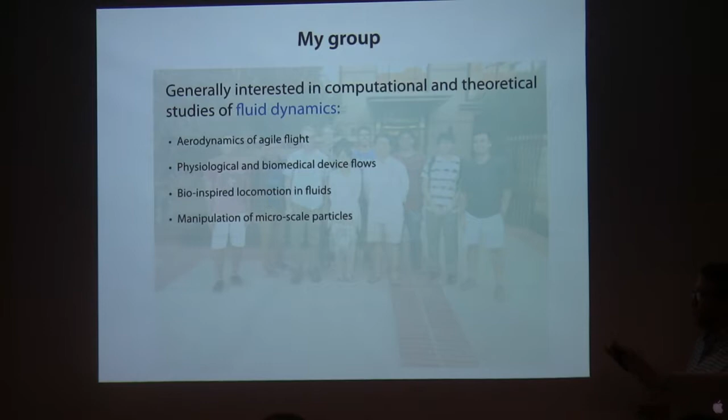So my research group is all over the place in the fluid dynamics world. It may not seem very broad to you, but to a fluid dynamicist, this is quite broad. So we work on problems in aerodynamics of agile flight, and I'll show you an example of that today. Also physiological and biomedical device flows, so we're working with people in the medical school on problems in their purview. My main topic today will be this third one, bio-inspired locomotion, and we work on other things as well. So basically we're just hard to pin down on what sort of fluid dynamics problems we work on, because I find a lot of things that are interesting among these things.

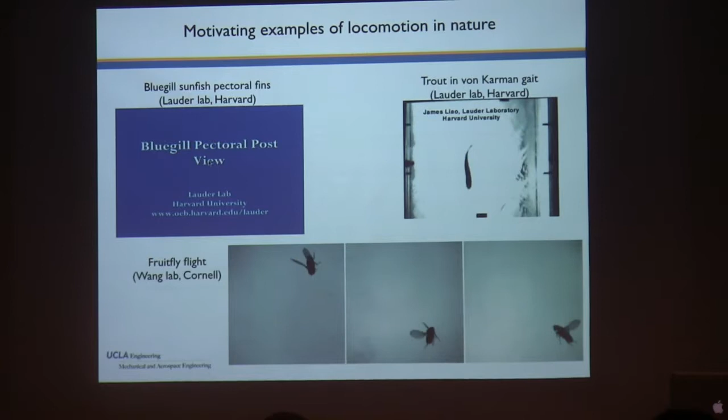Okay, I'm going to give these motivating videos here to sort of start the process. None of these are from anything I did. In fact, 2 out of the 3 are from George Lauder's lab at Harvard, someone that Malcolm knows quite well. Let's play them all sort of simultaneously. So the one down below is a fruit fly just undergoing some simple maneuver. This is from Jane Wang's group at Cornell, also a Cornellian. She was studying insect flight at the time, and so I stole one of her videos. And we'll be talking about that today.

The upper left-hand corner is a bluegill sunfish, and it's a view from the rear. I'll play it again. And so you can see the pectoral fins sort of come out and come back in again. So there's quite a bit of flexibility in those fins, and that'll be motivating some of the things we talk about.

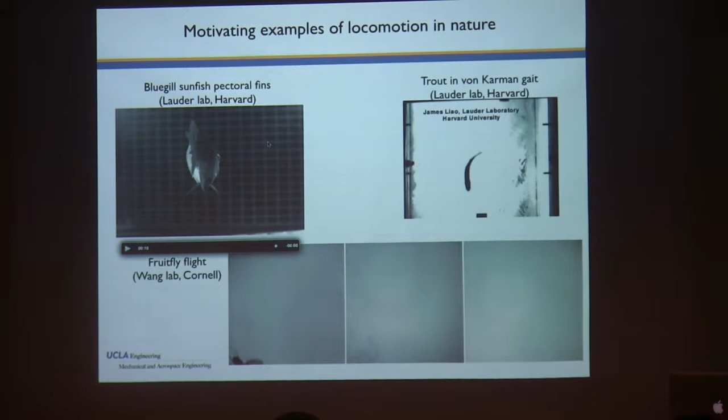And this one on the upper right-hand corner is one I find quite intriguing. This was done also in the Lauder lab by Jimmy Liao. So this is a fish in the wake of an obstacle. You can't see the flow, but the flow is going from bottom to top in this view. And this fish has positioned itself just in the wake. And so it's adopting a gait that they believe is energy efficient as it tries to keep station in that place. So that's something we'll talk about as well.

Okay, so the guiding research questions that overarch all this, I think are quite broad. So the first one is very broad indeed, which is what are the basic mechanics by which creatures move in fluids? But that's so broad that it's almost ridiculous to use that as a central question, and we have to be a little more specific. But that's going to be something that we try to pare down into individual subtopics here.

But one of the things that has always fascinated me is the question of flexibility. All creatures have some degree of flexibility in either their body or their appendages. It could be their wings or fins or the body itself. And I've always been interested in how that could be exploited for locomotion. It's something we don't often deal with in human-made technology, because we're generally trying to build things that are as rigid as possible because they're predictable.

But that's not necessarily a good thing. And the reason why we don't have more flexible structures is often because we don't really understand how to use it to our advantage. We can use it in an aircraft wing, for example, to some extent. Most of you have flown in an aircraft and you look out at the wing and you might see the wing going up and down a little bit, right? It does bend, and that's actually by design, and it's designed to bend in a way that isn't adversely affecting the flight, but it's there nonetheless. But we try to minimize that effect if possible.

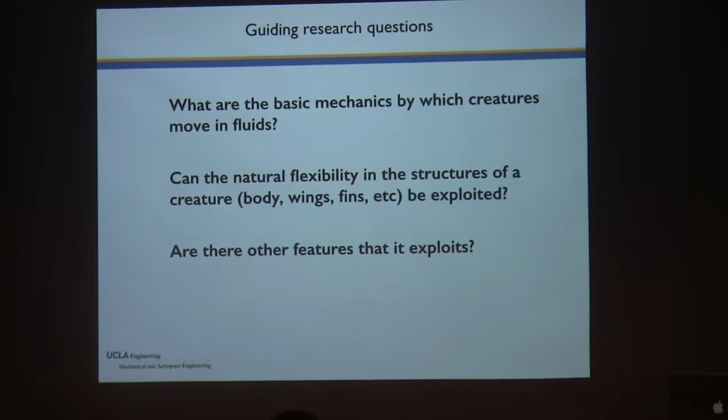But of course, as we just saw from those movies, creatures in nature have much higher degrees of flexibility. So I'm curious about what the roles of those are. And are there other features that a creature could exploit? This will motivate some of the things that, for example, Malcolm and I are currently interested in. And I'm going to take this approach that I call an engineer or physicist approach, which is let's set aside questions of other evolutionary pressures on these problems and just focus on requirements of locomotion from the pure mechanics standpoint.

All right? So for example, what we know is that the lift force on a creature must balance its weight, maybe with the inclusion of buoyancy if it's underwater. This is a general requirement in order for it to hover, for example, or to fly in general. And of course, it might exceed the weight when it wants to take off, and maybe it'll be a bit less than the weight when it wants to land. But generally, those have to be in balance.

Okay, so the thrust also must balance the drag force. There's a drag force on something that's swimming or flying, and so any forward motion comes from thrust, which needs to balance that. And then the last thing is that usually, not always, energy efficiency is a good thing, and it's something that they're trying to target. So we would generally want to get from point A to point B with as little energy as possible.

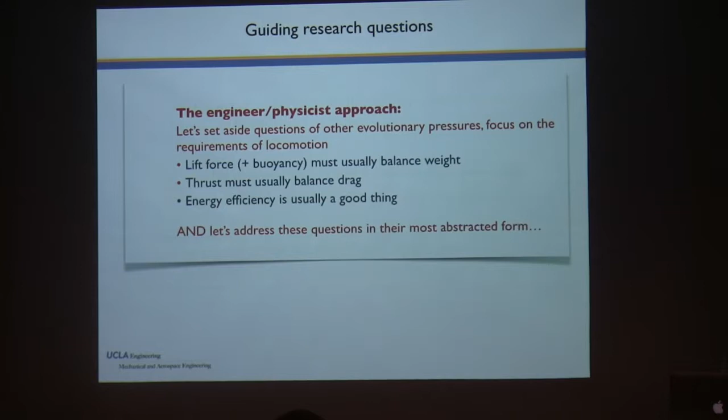So we're going to address those sort of questions, not on specific creatures. I'm never going to show you an actual specific species of creature in any of these examples I give. They will be in what I call abstracted form. And what I mean by abstracted will be pretty clear, I think, from the sort of pictures I draw here. Oops, that's a blank slide there.

All right, so there's 3 studies I'm going to show you today. These are studies we've done in our research group. The first one is a hovering insect flight with flexible wings, motivated by that video I showed you a moment ago with the fruit fly. The second one is on general body-caudal fin locomotion, which is a large class of types of locomotion in nature. And the third one is a variation on that, which is locomotion in the wake of an obstacle. So I'm going to add this extra dimension to the study too.

Okay, so the first one I want to talk about is flexible flapping in a hovering insect. I give this fairly general description of the structure of an insect wing. This comes from Dudley's book, which I was motivated by when I was doing this work, and he gives a nice description of some of these aspects. The wing structure is very intricate, with highly anisotropic stiffness. That just means that the stiffness in this direction is not the same as the stiffness in that direction, and it also varies quite a bit from place to place.

There's the veins that run through there, and the wing rotation starts, of course, at the root here, but then it propagates down the wing through a sort of torsion wave. So the wave spreads from the root to the tip, and that wing rotation is important because, as we'll see, the wing is trying to adopt a certain angle as it's

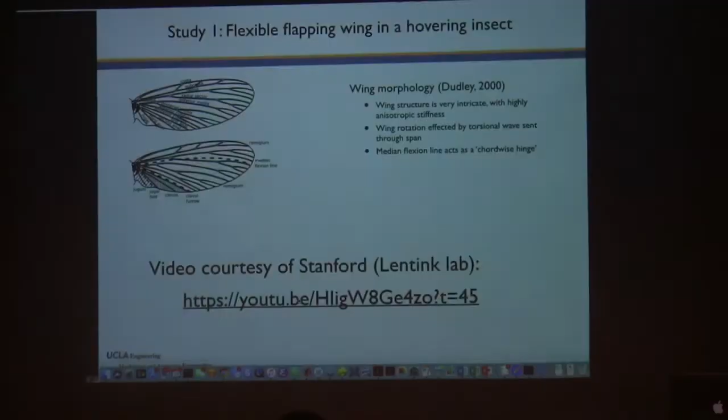Okay, I'm going to try to show this video here. It's a link to a YouTube here. Let's see if I can. Okay, this is from David Lentink's lab at Stanford, so I'm stealing other people's videos here. This is his video from a moth. I'm not sure. Someone else can say what species it is. That looks like a bee, I think, right?

So I'm not a biologist, so I'm not going to claim any, but what I'm motivated by here is, by the, okay, Stanford News Service, good for you. That was, yeah, so I wanted to sort of back up a little bit here.

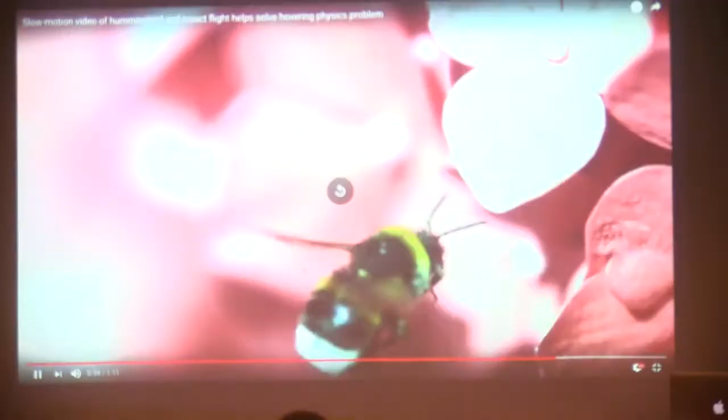Oops, that's too far. Okay, so you can see all that flexibility in those wings there, and you can also see the general flapping cycle is this wing going back and forth, and you can see the change of the rotation of the wing as well. This one, if you slowed it down even more, you'd see that this wing keeps rotating itself as the stroke proceeds.

Oops. You can see this is what my son watches on YouTube, so you can see what his whole YouTube playlist is here. So he's corrupted my YouTube playlist here. Oops, I went to the wrong presentation here. Naturally, it decides to. Oh, come on. Okay, there we go. That's what I want.

Okay, so this is that view I showed you a moment ago from Dudley's book. And what we're going to do to abstract this is something that's become quite common in the engineering view of things, which is we're going to focus on a two-dimensional cross-section of this wing and look at the aerodynamics of this wing in that plane, this slice here. This is something we do quite commonly in fixed wing aircraft. So the wing is very long, and so we make the argument that we can focus on one

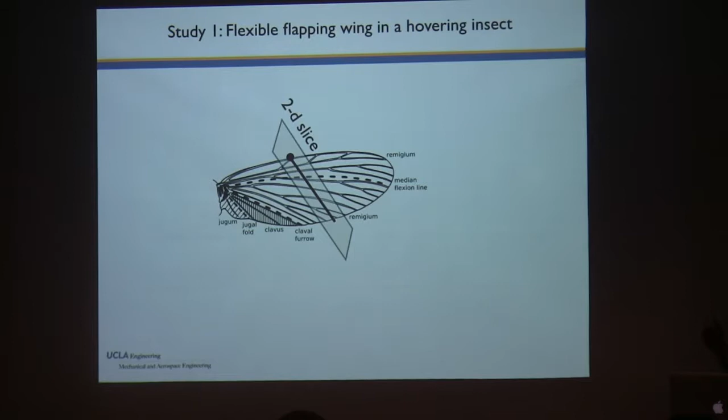cross section. Now that's a little bit more dubious with an insect wing because this aspect ratio, in other words, the length of this wing compared to its chord, is not so big as it is in an aircraft. The length of a 747's wing is much longer than its chord length, which is the length in the flight direction. This one is a little more dubious, but we're still going to use this as a basis for studying things, and we'll justify that later if we can.

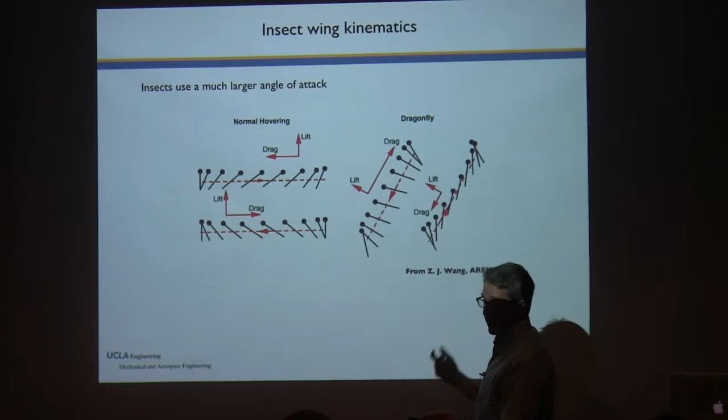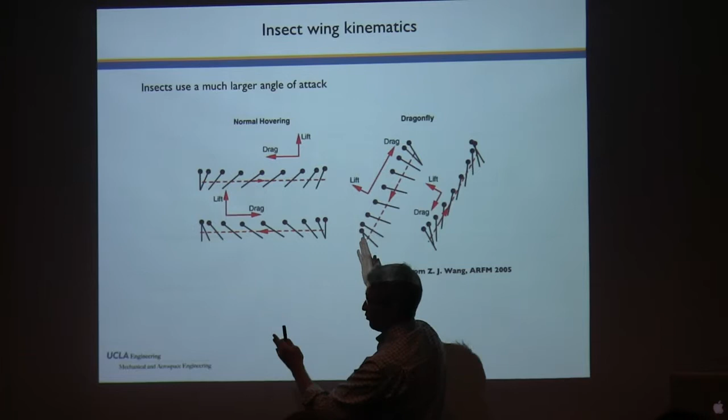And then when it changes direction, it's still producing lift this way. But now the drag is reverse direction. Okay, so the drag is the energetic cost of hovering flight. If it's trying to fly forward, then it would just change the whole angle of the stroke plane. So it's like thrust vectoring, okay? If you want to develop thrust, then you move the lift vector this way, so you could change the rotation angle or change the body angle of the insect.

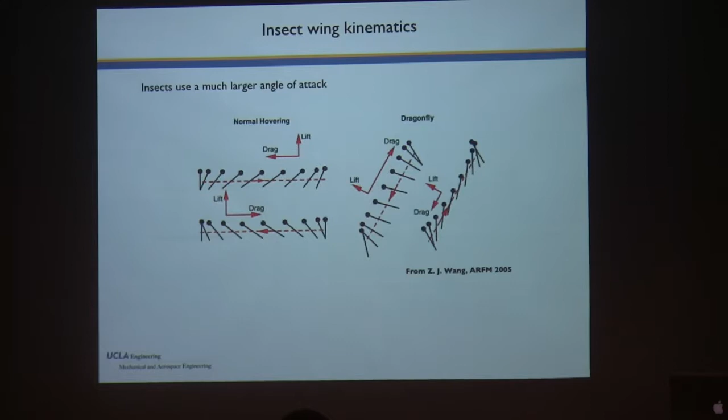Dragonflies are more complicated. I showed a dragonfly here because two wings are obviously more complicated, and I'm not going to dwell on dragonfly wings here, but one wing is hard enough, all right? Okay, so what happens when your angle of attack is large? You know, this is the small angle of attack. What happens when it's large is something we usually try to avoid in aerodynamics, which is called stall. And so when we undergo stall in an aircraft, that usually means we're falling out of the sky. That's not a good thing, right?

So there's stall indicators on aircraft, and if you follow the news with the 737 MAX aircraft, for example, the stall indicators were not working very properly because they had angle of attack sensors on the aircraft that were not agreeing with each other, and they were giving bad information to the flight controller, and the pilots were out of the loop. Okay, so all of these things not going well, but the basis for all that was either stall or a false indication of stall. Bad things usually happen. Okay, but here's what stall looks like from an aerodynamics point of view.

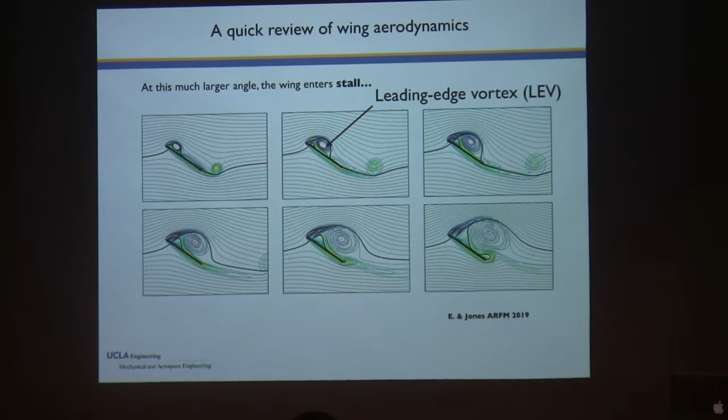So this little feature right here is called a leading edge vortex, right? Or LEV is a shorter name for that. That leading edge vortex is an indication that stall is about to happen. In fact, this process is what's called dynamic stall, as I'll refer to in the next slide, I think. Okay, but this is still not full-blown stall yet. This is the early stages of stall, all right? And so what that means actually is something that the insect can exploit. Okay, so stall can be good for a little while, right?

This is a plot of the lift force on that wing versus time. Time is being measured here by how many chord lengths the wing has traveled. So after 5, that means it's traveled 5 of its own lengths forward in that amount of time, all right? So what this is showing is that the lift is actually quite large. Think of 1 or so, or 1.5, as being what the wing would generally achieve if it was a small angle of attack. It's achieving much larger lift than it would otherwise. But then things drop fairly suddenly, and that's because this LEV here, this leading edge vortex, is about to separate. It's about to detach itself from the wing, and then you don't get the benefits.

So why do you get these benefits? It's because a vortex, basically, you can think of as a region of suction. Basically, it's low pressure. This region right here means low pressure. Low pressure means it's basically exerting low pressure on the wing. The wing gets lower pressure, which means force in that direction. Okay, so it's sucking the wing upward, if you want, right? So that red line basically indicates how much suction there is in that place. So by the time this vortex is over here, that suction is essentially dissipated.

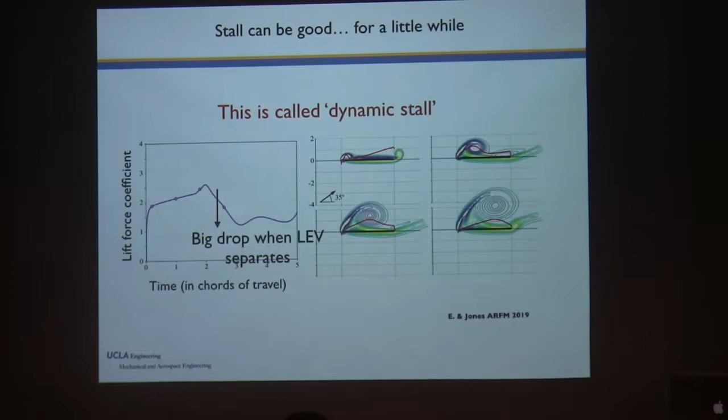Okay, so at stall, we have bad effects. We get low lift. But for the early portions of time, for those first 2 chord lengths of travel, we get large lift. Okay, so this is, like I said, called dynamic stall. And so insects exploit this. They use stall all the time. They're always in stall, but they're always in dynamic stall.

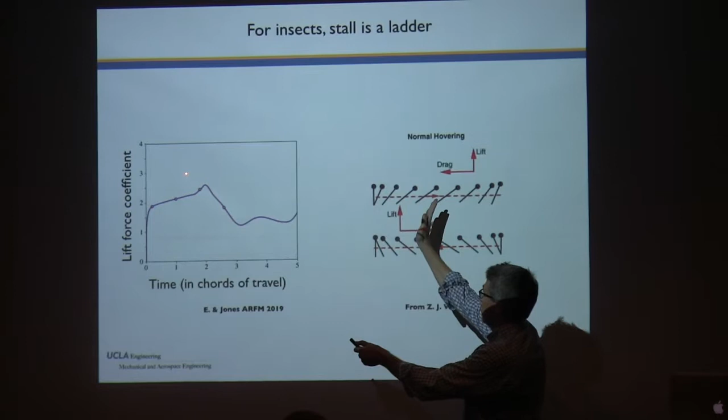And so insects don't worry about undergoing full-blown stall, because by the time they're about to reach full-blown stall, the wing changes direction, and now it generates a new set of dynamic stall. So it starts the process here. Let's imagine going up this line right here, and then it switches direction, and then it does the same thing again in the other direction.

So it's always achieving that higher lift. And so that's quite different from our conventional aerodynamics point of view, where we're trying to avoid stall. Here it's using that dynamic stall to its advantage. All right, so the timing of insect flight, and the flapping of a wing, exploits this feature quite nicely. Okay, so that's a pretty typical view, and that happens whether it's a rigid wing or a flexible wing.

We're going to talk about flexibility here. And here's my abstracted model of a flexible wing. So the study that I showed you from Jane Wang there was actually a rigid wing that she was studying in those studies. And I'm going to take that and just add one extra degree of freedom, which is I'm going to make a little spring here, a torsion spring right in the middle, and think of this as two rigid pieces stuck together with a torsion spring.

That's much simpler to analyze than a full insect wing, where I can't really simplify the flexibility into something simple. So I like this from a physicist point of view because I can understand how to control flexibility. I just change the stiffness of that spring, all right? And I can study that in a more isolated way. I'm not going to make any claims about insect flight per se with this study. I'm going to just be able to talk about how hovering flight with this system gets affected by its flexibility.

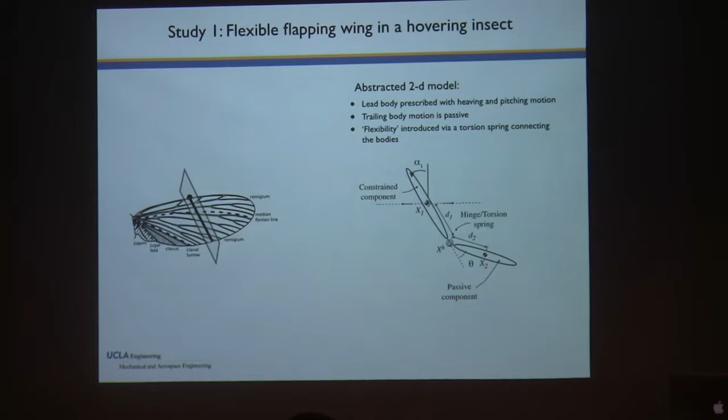So I'm going to show you a picture of that vortex shedding here. This is, again, looking at things like the leading edge vortex coming off the wing, but it's going to now have this extra degree of freedom that's flexible, right? So you can see these are what are called vortices, okay? So there's vorticity coming off the trailing edge, but you also would see vorticity coming off the leading edge as well.

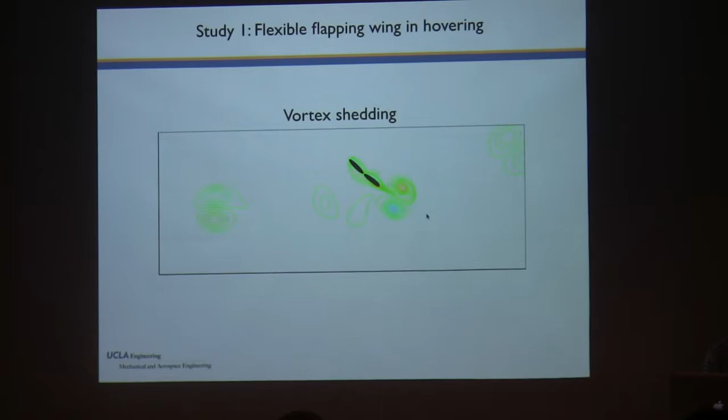Oops, let me go back and okay, let's see if I can, I can't pause it. Maybe I'm not very good at pausing. Okay, I can't pause it. Anyway, it's not that important. All right, so I'll show you some pictures on the next few slides that show it better.

So in physics, what matters for determining the mechanisms are ratios of different effects, okay? And what I'm showing here is all the different ratios of things that have a role to play in determining this. Even this very simple model has a large number of different possibilities. So one is the heaving amplitude. How far does it travel side to side compared to how long it is? Okay, that's the first one. The other one is the pitching amplitude. How much does it rotate back and forth as it's doing that?

Okay, the pitching axis location, I won't say much about it. It's like, what point is it rotating about? This one right here is really important. So remember, we have an oscillatory motion of the wing going back and forth like this, and I have an oscillatory motion of the thing going back and forth like this. What about the timing between those things, right? That's this phase right here. So this is the timing between those two types of oscillation. This plays a pretty big role in these aerodynamics, all right?

The other ones, so Reynolds number, you may have heard of before, but may not, this is a fairly common parameter in fluid dynamics. It's a ratio of how important the inertial effects in the fluid are to how important the viscous effects in the fluid are. Those are the two dominant forces in a fluid. And so that basically is like a knob that allows you to just decide those relative roles.

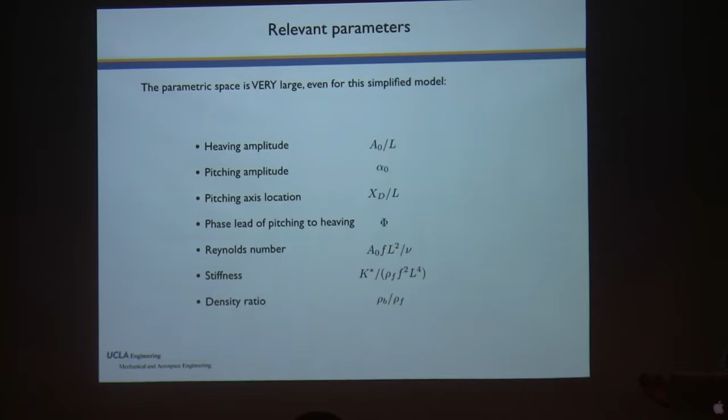Lots of different things to play with, but we'll just choose biologically relevant values for them, and not try to explore this entire parametric space. It's way too much to do. And let's just focus on some key aspects of these two right here. In the time that I'll spend on this, I'm just going to give you a very brief story about this.

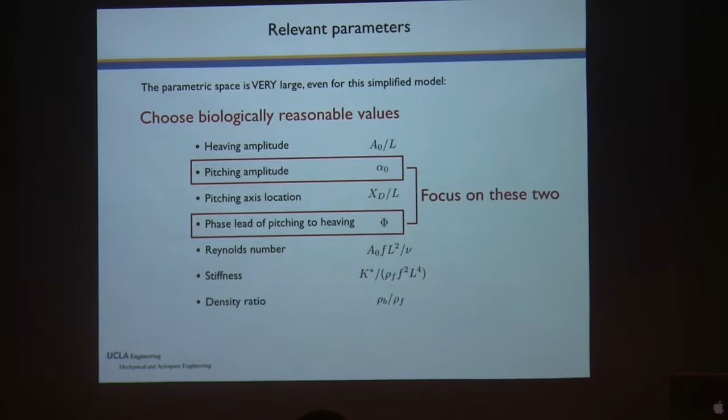That's a really important observation, because what it means is that even though the phase lead, this timing between the pitching and the heaving part of the problem, is important for a rigid wing, it has a big effect and is sensitive to that, it's not so important for the flexible wing, right? So it's able to sort of mitigate the effect of this parameter by being flexible. And so to understand why that's the case, it helps to stare at some pictures here.

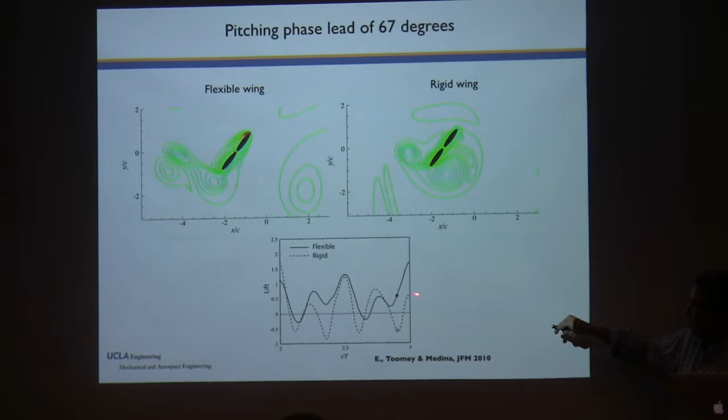And so what happens next is that this flexible wing sort of accommodates that LEV into its wake a little bit better. And by the time it's here, it's basically gone. And down here is showing the lift force. The lift is always positive with this wing right here. It actually is negative for some portions during this one. It actually drops below 0. So that rigid wing has more problems than the flexible one does.

Okay, so it's about how when a wing is flapping back and forth, it keeps flying into its own wake, right? So it keeps encountering what it left behind. And the flexible wing is able to accommodate that better. All right, that's the main story there.

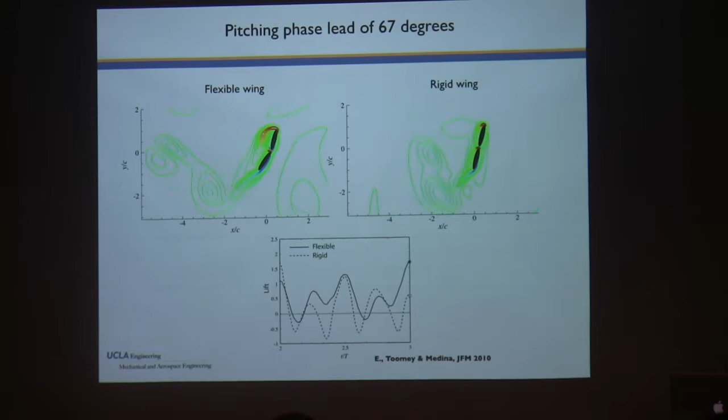Okay, another aspect is not just the phase difference between these two things, but also how much it rotates back and forth. So if I have a rigid wing, in order to get lift, I have to actually do some rotation, right? I have to have an angle of attack. So if my rigid wing just went back and forth like this, I would get no lift because there would be no way to exert a force on this wing upward, right? So this is kind of obvious. If I move back and forth, I get no lift.

But if I have a flexible wing, even if I don't actually rotate the wing, I still get rotation because the wing is flexing every time I move it back and forth. So if I move it like this, the wing flexes like this, and it moves back like this, and it flexes like that.

So it's adopting sort of a passive change of angle just by its flexibility. So what this is showing is exactly that effect right here, that if the pitch amplitude of the rigid wing is 0, then basically I get 0 lift, right? And as I change that pitch amplitude and make it bigger, more and more rotation of this wing back and forth, then I of course get more and more lift, right?

Not a big surprise. But the flexible wing even gets lift even at 0 pitching because that flexibility is giving it sort of a pitching for free by its own flexion, by its own bending. So this is what it looks like right here. Here I actually threw in a third ellipse just to make it a little more interesting, okay? But it's still a very simple model for a flat, flexible wing.

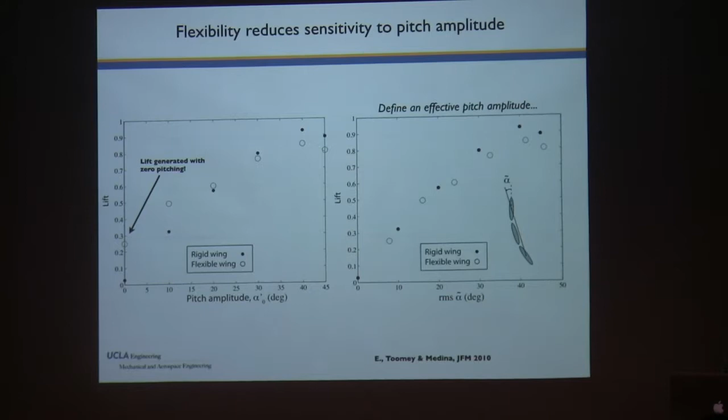Okay, so just to summarize this case study of flexible wings, the wing structure and kinematics, of course, in different creatures take many different forms, right? It's impossible to assimilate them all into this study, but it's reasonable to state based on a few of our observations here that you can probably make a hypothesis that some flexibility makes wings effective over a broader range of conditions, or a broader range of kinematics, for example, right? So flexibility can sort of smooth the sensitivity to kinematics.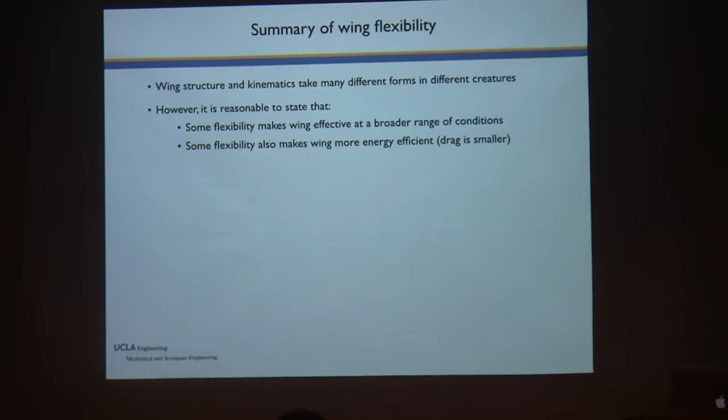Okay, and also something I didn't really show here, but it's sort of obvious when you think about it, that as this wing is moving back and forth, when it's flapping, it's going to have less energy cost for that, right? Because the drag is actually less. So if I have a flexible structure, it has lower drag as it's moving through the fluid because it bends in response to the fluid, and so it adopts a lower profile, basically, okay? So the drag is smaller on these flexible wings, and so they're more energetically efficient.

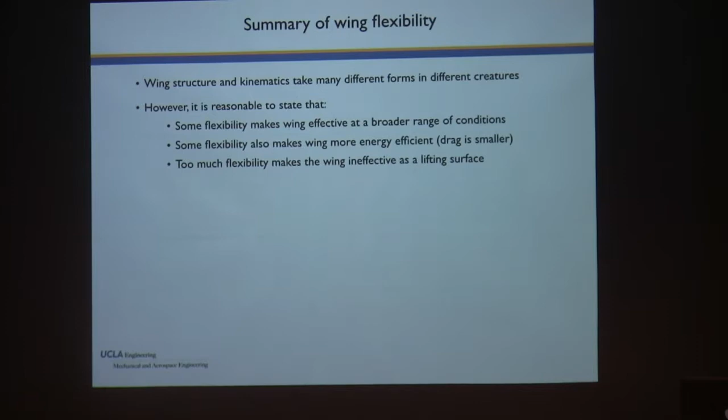But if I make it too flexible, and I didn't show this very much here in the interest of time, then they basically become ineffective as a lifting surface. You can't even really fly with them. So there's an upper limit on how flexible you can make a wing and still have it effective.

Okay. All right, so moving on to something totally different, okay, swimming. So this is study number 2. Of course, this is quite different biologically, but it has a lot of mechanics that aren't too different from flying, and I'll explain what I mean by that. So obviously, most fish are not that motivated by the need to generate a lot of lift. Some, of course, do generate some lift, but it's not nearly as bad as it is in air, because in water we have the benefit of buoyancy, which can offset their weight, right? Okay, but I'm interested more in thrust production here.

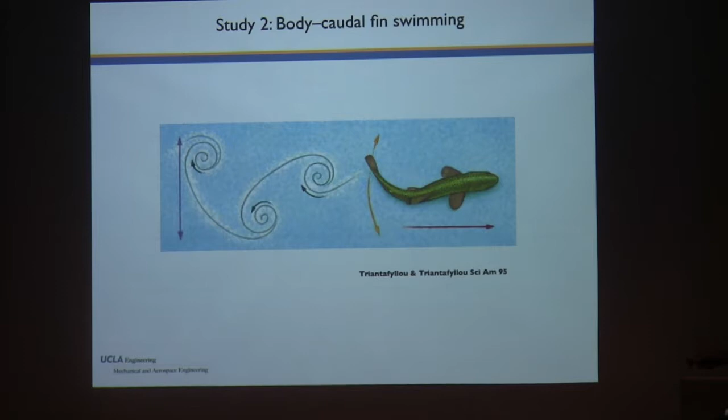And so this is a paper from 1995 that Michael Triantafyllou wrote, where he was, I think, as an engineer, sort of ahead of his time in understanding the role of the wake of a fish. And this is a nice cartoon rendition from that paper. This is from Scientific American. So these are the vortices. This is the wake of this fish, but each one of these is a vortex. And so I'm going to try to explain what's going on here.

Every time this caudal fin beats back and forth, it's creating vorticity as it moves through the fluid. And that vorticity rolls up into these structures. So this is what we call a vortex. It's a structure of rotating fluid all sort of put together. You can think of it like a little tornado in there, right? But this thing has a lot of energy to it.

And when they're paired with other vortices of opposite sign, like this one is rotating, in this case, counterclockwise, whereas this one is clockwise, if you imagine what they're doing, they are associated with fluid moving this way, or from this side to this side, right?

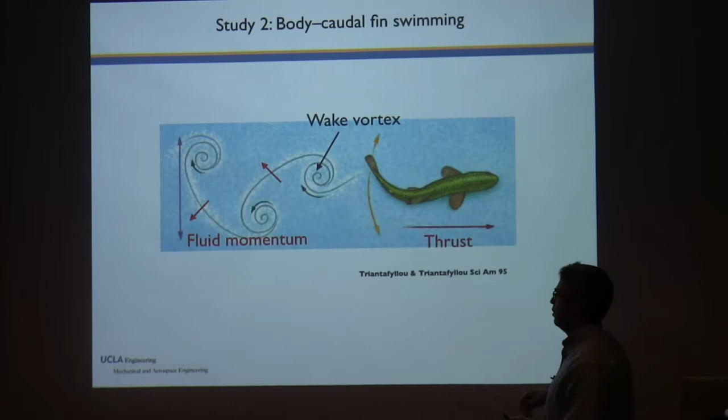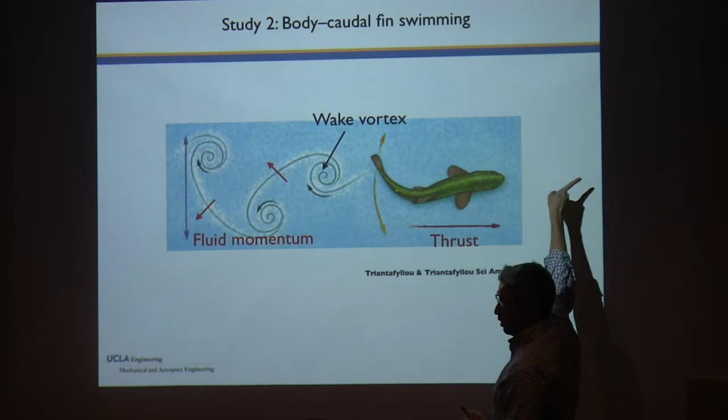Because of the arrows that you can see are sort of, imagine them like rollers that are rolling the fluid through there. So that means there's momentum in the fluid traveling this way, momentum that way. So those red arrows indicate the direction of momentum. And if you think about Newton's laws, then you can remember that if I have momentum in the fluid this way, that means there must be a force on this creature pointing that way, all right? So it's a balance of momentum in this system.

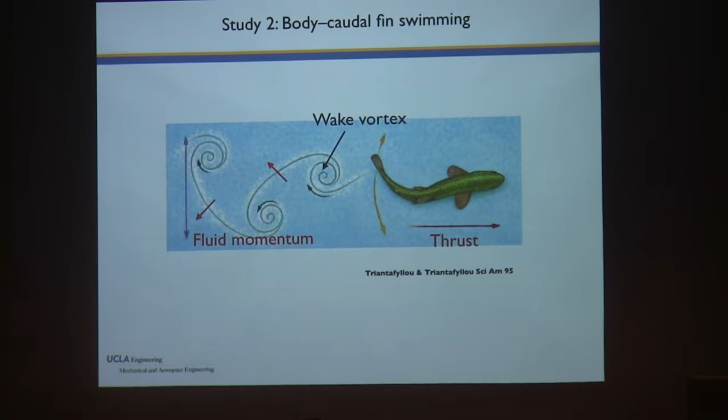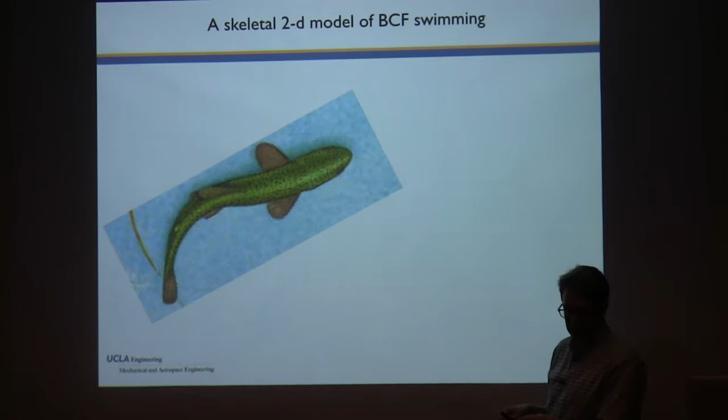Okay, because this fish, of course, is exerting a force on the fluid in this direction in order to give itself forward thrust, right? So thrust is always associated with momentum in the opposite direction in the fluid. Okay, so I'm going to take another sort of distilled or abstracted view of this fish. I'm not going to try to analyze this whole thing. Many of my colleagues in fluid dynamics have done awesome jobs, really amazing jobs of doing large-scale computational studies of things like this. And I'm not going to attempt to do that because it's way too complicated. I like this view, okay?

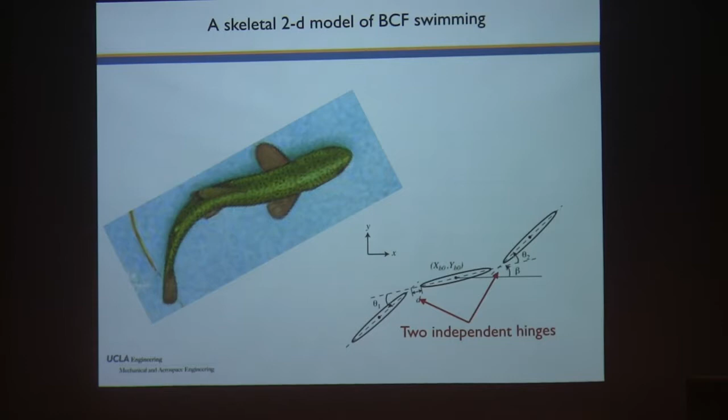I'm going to think of this as not three-dimensional, just two-dimensional, right? And also not a whole structure of skeleton and muscle and so on, but just 3 links, okay, with 2 hinges. And so these hinges here are my 2 degrees of freedom, right? I have 2 independent hinges. It's much easier to deal with that system than it is to deal with figuring out how all the muscles are activating in sequence here and causing this to flex its body, and then trying to understand all that structure. It's too much for me, right? So I take this view. And so this sort of skeletal model, this 3-link swimmer, is useful, okay, for understanding some things.

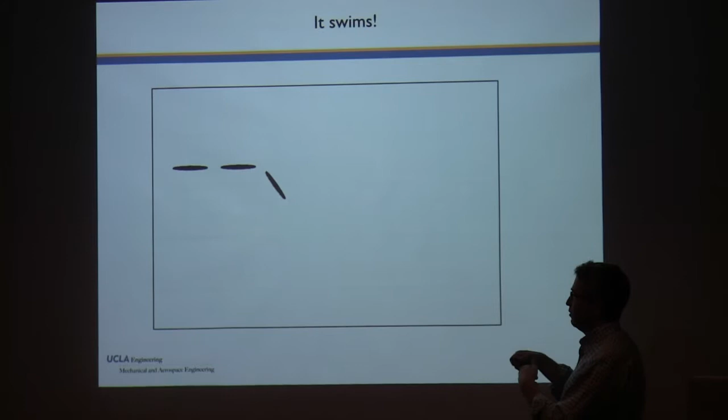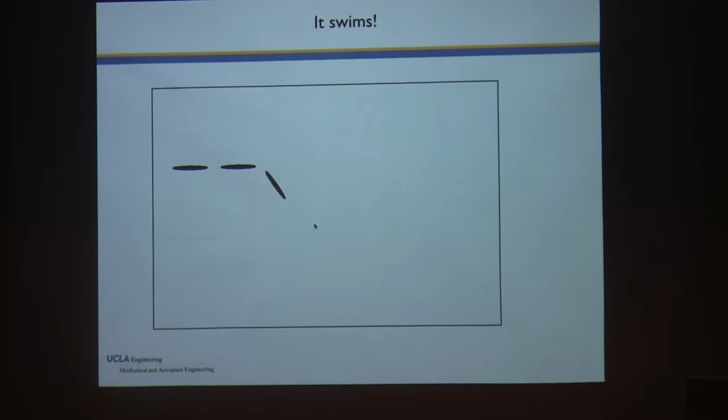So first question is, if I control those 2 hinges, this one here and this one here independently, and just give them a purely oscillatory motion and make it just move back and forth like this, then what will happen when I place it in a fluid? So this is a numerical simulation. It's a computational model of that. And so I'm going to show you this video, okay?

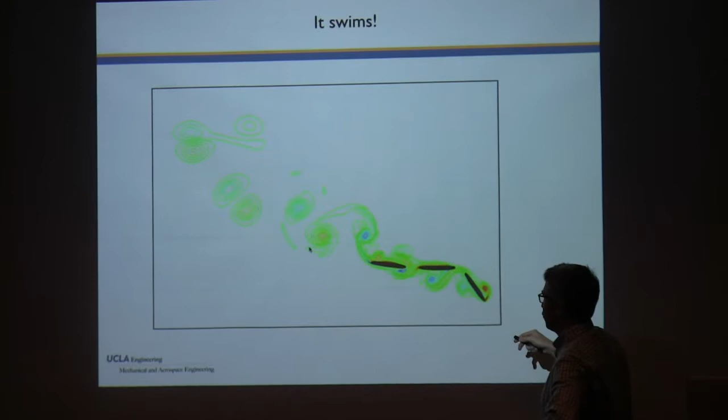Now, you might be a little troubled by the fact that my fish has holes in it, right? That's okay, you can be troubled by that. It doesn't matter, actually. It makes it a little messier, but actually it makes it also a little bit easier to deal with numerically as well. I won't go into the details of why that is. So suffice it to say that, yes, it makes it a little more complicated in this area. It doesn't actually have really any consequence on the aerodynamics, the hydrodynamics of this swimming thing.

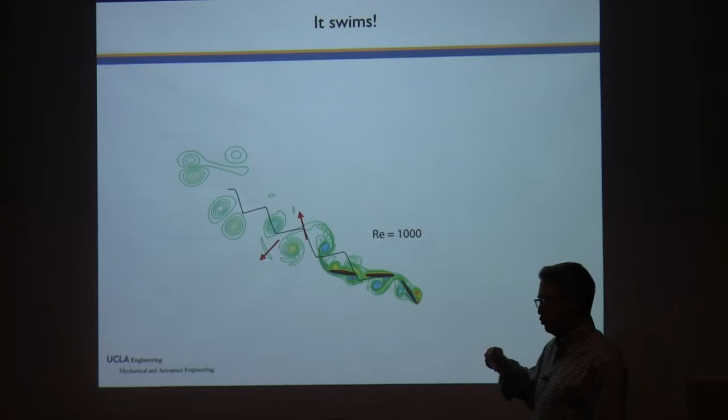So if you want the fancy name, this is what's called a reverse Kármán vortex street, all right? Which is the opposite of a Kármán vortex street, or von Kármán vortex street if you're being a little bit more precise. So a regular vortex street would be behind an obstacle that has drag. This is a reverse von Kármán vortex street, which is indicating thrust, right? So these types of vortex streets indicate either thrust or drag, depending on the orientation of the arrows. Okay, so it swims, okay, so that's good. So basically this three-link swimmer will swim.

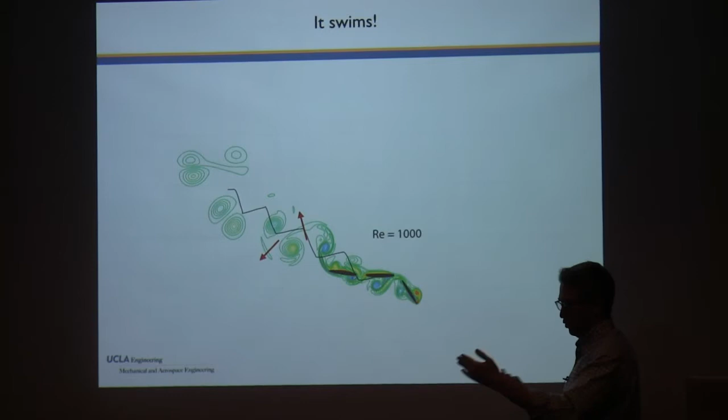And so the next question I might want to ask is, okay, well, I just chose a Reynolds number. RE, remember, means Reynolds number. That's the ratio of inertial effect to viscous effect. So it's something that with my very simple abstracted model, I have the ability to decide what that Reynolds number can be. Like how much should inertia and viscosity be in play, relatively speaking.

Okay, so what if I just change the Reynolds number to something smaller? Smaller Reynolds number means more effective viscosity. Viscosity is more important. So it's not that surprising to find out that when viscosity is stronger, viscosity is like friction in the flow, right? So if viscosity is playing a bigger role, it means that in the same amount of time, this fish swims less, all right? It doesn't swim as far.

And so what we might be surprised to find out, okay, now let me, before I go into the next little surprising point, viscosity is the reason why there's vorticity, all right? All that vorticity that I've shown you, all these slides, this is all vorticity here, all these vortices, okay? The plural vortexes, vortices. All these things are there because viscosity was responsible for creating them. It's the friction in the flow that ultimately leads to this wake, all right?

So I'm doing this on a computer, so I have the ability to turn viscosity off. So I can say, you know what, let's do this without viscosity and see what happens. I can't do that very well in a real fluid. The only place where viscosity is sort of off in a real fluid is superfluid helium, which I'm not going to do, okay? So I'm going to do this on a computer without viscosity. And you might say, well, what's going to happen? I'm not going to get any vorticity, remember?

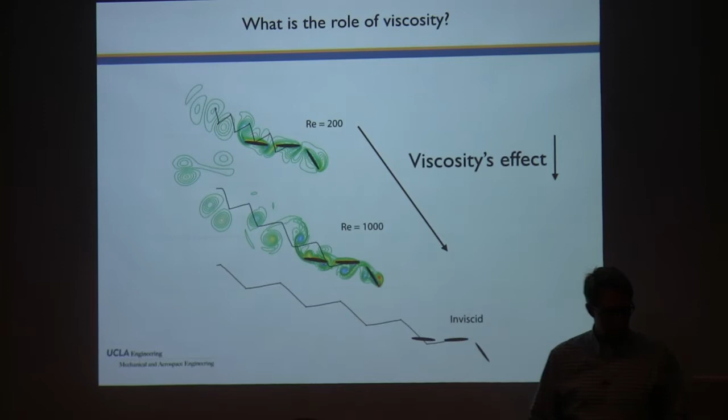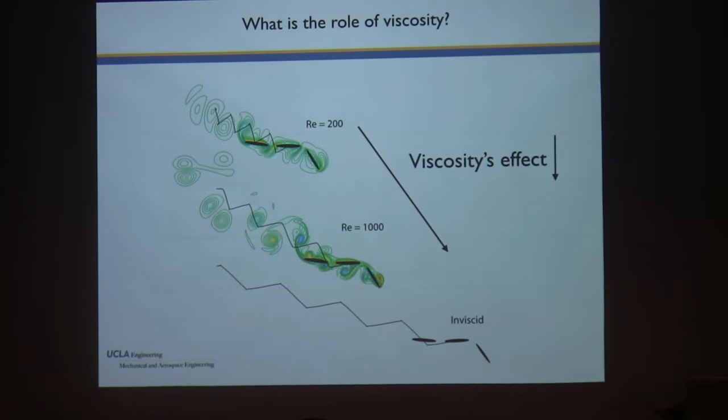And just like when we swim in the swimming pool, right? If we give ourselves one stroke, we can propel ourselves for a little while and glide. That's something that fish rely on all the time. This swimmer cannot glide because its momentum in the fluid turns off immediately when it stops moving its own hinges, okay? So that's kind of an effect that's hard to process because we don't have an experience with inviscid fluids. We have no intuition for it. But what this is showing is that it swims faster because there's no drag on this. There's no drag on here like there is there.

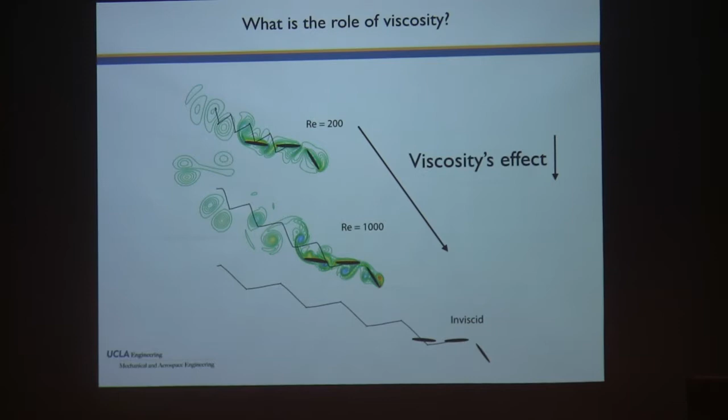Okay, so the last problem I'm going to talk about is that same swimmer, that same three-link swimmer, but I'm motivated basically by that video I showed you at the very beginning from Jimmy Liao's fish behind an obstacle. And there was a follow-on study where they basically put a dead fish behind the obstacle. They just tethered it, tied it with a string to the obstacle, and they wanted to understand basically what happens to a dead fish. Because their hypothesis was that this is a flexible fish, even though it's dead, right?

It's still flexible. It wasn't frozen, right? And so if you put this in the wake of an obstacle, then its natural flexibility should be excited by the wake, right? So it should start giving itself some undulatory locomotion, even without having active muscles to create that, right? So can you extract energy from a fluid motion in order to propel yourself forward in a passive way?

Okay, so their study showed that you could, that it would actually move. It was kind of a remarkable thing to see that. And so, like I said, they attributed it to the fact that the flexible dead fish was extracting energy from the surrounding fluid, the wake of this obstacle, in other words, and was able to move itself in that direction.

Okay, so I'm going to do the same sort of experiment, except I'm going to do it computationally with my three-link swimmer here. So it's not exactly the same, but it's the same idea. And I'm not going to have a tether. So I have this sort of line here. This line basically prevents this fish, I'm going to call it a fish, just bear with me, from being swept further downstream than this line right here. So it's like this virtual wall, all right?

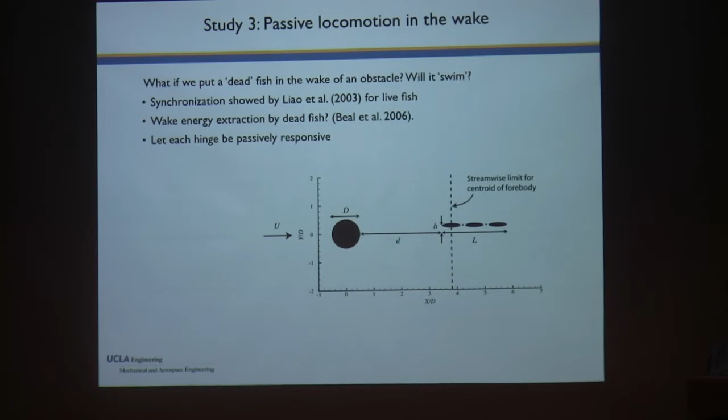And so it'll be free to move upstream, if possible, and also be free to move side to side as well, all right? So each of these hinges here are completely passive. They don't have any springs, no motors on them. They are just going to be free to rotate under the forces acting on it from the fluid, okay? So here's my first try at this. Like I said, when it starts out, the wake behind this cylinder hasn't really developed yet. So it takes a little while to develop.

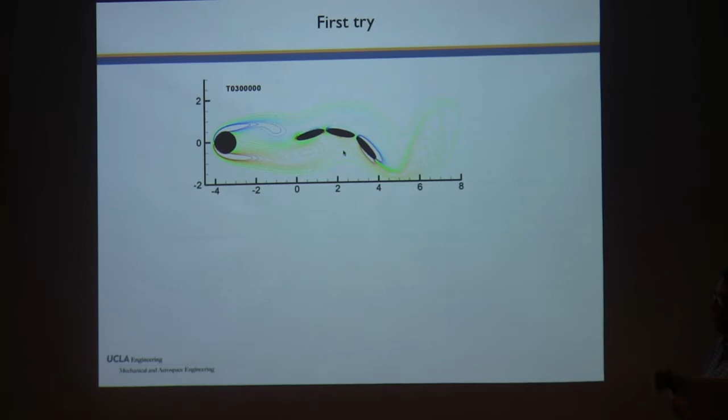So right now you see this wake behind this cylinder starting to break its symmetry, and now you can see the fish is starting to move back and forth, but it's actually not moving in this direction at all because it's stuck against that virtual wall that I mentioned, right? So it's like it's pulling against its tether. So it moves back and forth and undulates, but it doesn't propel itself in any way, okay? So that was the first try.

And so we said, okay, let's make it smaller. And so we did the same thing now with a shorter fish. Okay, and so now everything looks about the same at the beginning. It's still stuck against that virtual wall, and then a little bit later, right around now, it starts moving upstream. Okay, so like that. And it doesn't keep moving; it actually stops. It reaches sort of an equilibrium there.

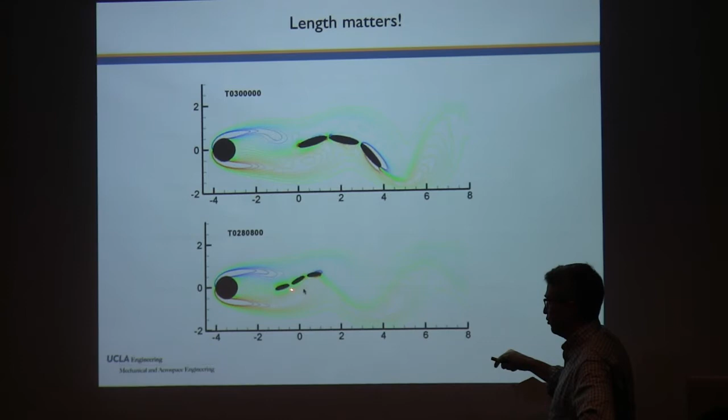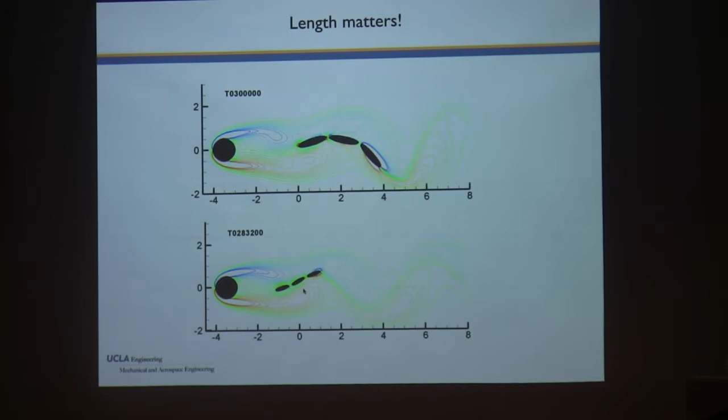So it moves most definitely upstream without any of its own energetic input. So it's extracting energy from the flow. And so that was interesting. So it matters how long it is, all right? So that longest case, this is L over D. D is the diameter of the cylinder, and L is the length of that fish. So when it's too long, then basically there's too much drag on it, so it just gets held at that virtual limit, that virtual wall.

When I make it a little shorter, then it starts moving upstream, but then it actually moves back downstream again. So it starts to move towards the cylinder, and then it moves back again. And then finally, when I make it really short, it actually moves even closer. So I was interested in this because it's obviously indicating energy is being harvested or extracted from the flow. And so I asked a question that seemed like an obvious one to ask, which is: is the body flexibility important for this?

So it was taken for granted, I think, by that study at Harvard that the flexibility was essential for this. So they had just done the study with this dead trout, and they got their conclusion. I'm going to just do the obvious thing with my model. I'm going to make those hinges locked, all right? So now it's still a 3-link swimmer, but the links are all frozen in place. So it's not going to be allowed to flex. And so I'll put that in. So, anyone venture a guess? Is it going to swim or not?

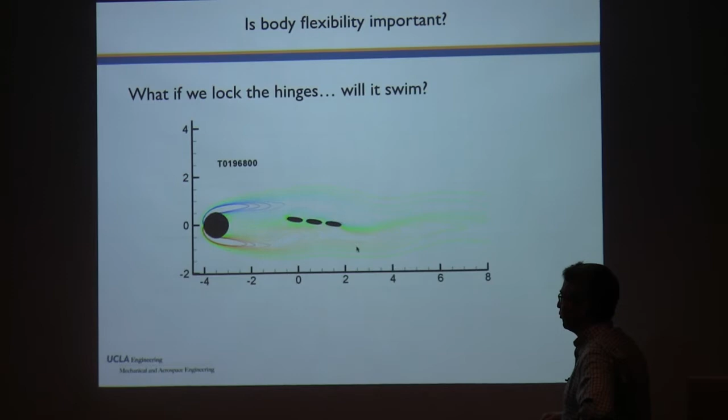No, exactly. I'm glad. I like the bold answer. This is exactly what I wanted, because you set it up perfectly. Because it does. So it goes upstream. So it doesn't matter that it's flexible at all, at least for this system.

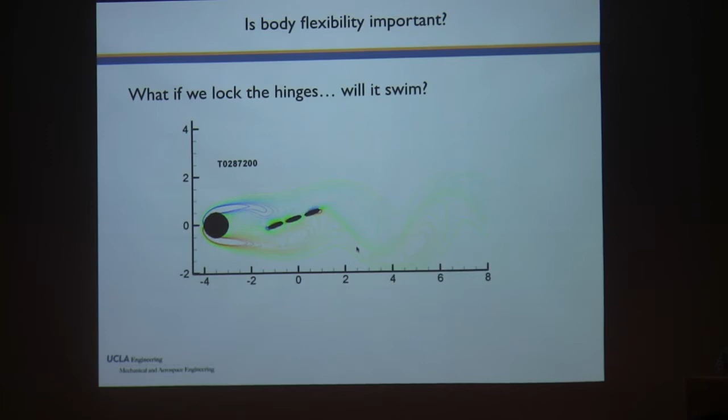And it's a little more effective even. It's almost the same trajectory, and it swims a little further upstream than the other one. So the question is why? And to understand why, it helps to understand what's going on in the wake of an obstacle. And this is true about any obstacle, not just a cylinder.

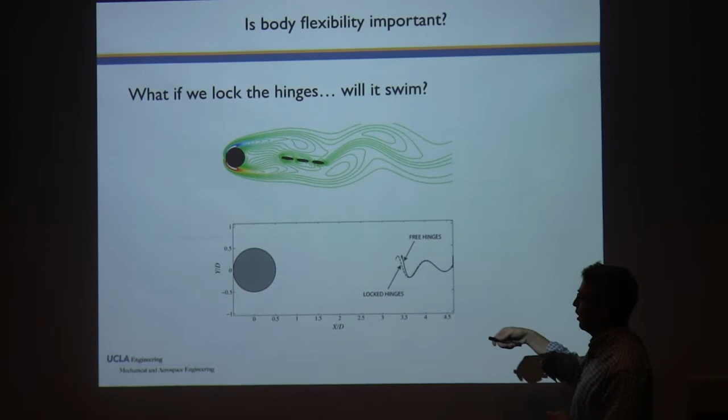In the wake of an obstacle, there's suction, basically. So I got this region back here that's a region of low pressure. This is one of the reasons why there's drag on an obstacle. It's partly because there's low pressure back here, all right? So this region is pretty limited, though. It's only a couple diameters long behind an obstacle.

That's what actually the Harvard team was trying to prevent from being an issue. So they put their fish way back here, like 5 diameters downstream, because they didn't want this to be the reason for it moving forward. Except that when you place something in the wake of an obstacle, like a fish, it changes that suction zone. It makes it longer. So when you put a fish back there, it makes it twice or even 3 times as long.

So just by putting this fish back there, this is actually well known because people have been using techniques like this to change the drag characteristics on obstacles all the time. They actually place flags and things like that behind things. And so they've known this. This is actually known from some work of my friend Don Rockwell at Lehigh University. So he had known this for decades already.

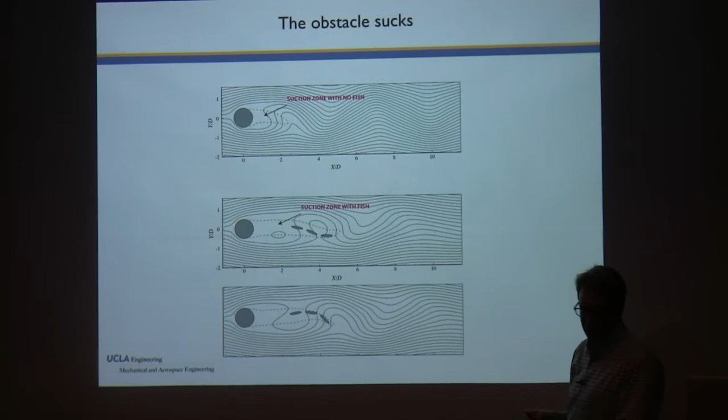And so I just mined his results and basically confirmed it here for ourselves, that by placing the fish back there, it actually sucks even more, right? So to speak. All right. This fish is being sucked, whether it's flexible or whether it's rigid. It doesn't matter. Okay.

I think I'm about right on time here. The conclusions I want to make here are fairly simple. I don't have very specific conclusions except to say that these simple abstracted models of locomotion, biolocomotion in fluids, can provide us with some insight. Okay, let's just leave it like that.

But I also want to point out that I've been using these sort of problems as teaching tools as well. And the reason why is because engineers learn fluid dynamics with a couple of key target problems in mind. They're learning about it because they're going to design aircraft, wings and things like that. So they learn basic aerodynamics, or they need to know how fluids move through pipes, for example, right? The sort of things we do with fluids as engineers. And it doesn't vary that much from there.

And the curriculum in fluid mechanics hasn't changed much in about a century. Really, it's kind of embarrassing actually. You can ask any person who studied engineering, and the syllabus they studied, whenever they studied it, was the same as what I'm teaching now. All right. Now that makes me look bad, but it also means that we need to think about what our target problems are, and they're evolving.

Okay. All right. So I use biolocomotion to help us explain fundamental concepts that we don't usually see in a conventional fluid dynamics class. So aerodynamics of stall, right? So we saw stall as being actually a benefit to insects. And just understanding the view of stall from that point of view is important. And so it can be used, for example, for maneuvering small vehicles around better. So a lot of small vehicles can be made more agile if we can exploit stall as opposed to trying to avoid it. So I use that.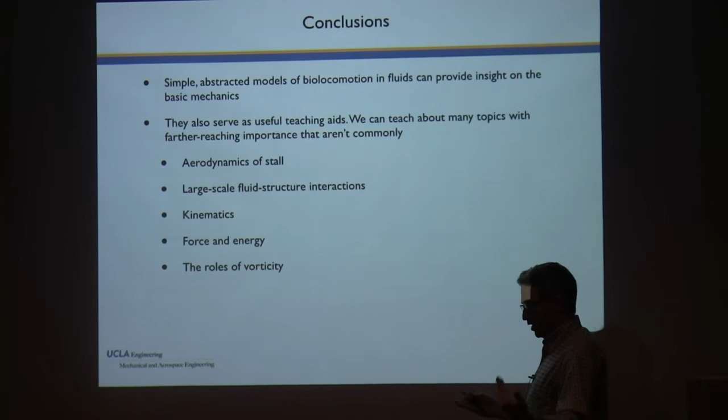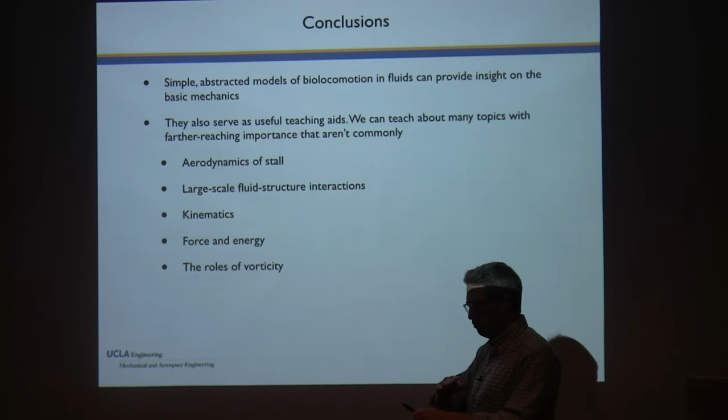Large-scale fluid structure interactions. So of course, all aircraft, like I mentioned at the very beginning, they all are a bit flexible. So we have to deal with what's called aeroelasticity, aeroelastic, right? Those effects are important for designing aircraft. But they don't occur at the large scales. I mean, insect wings or the fish body, they all are flexing much more substantially under the load of the fluid than we would get in most human-made vehicles. So these sort of fluid structure interactions are much more substantial in biolocomotion. And so you have to sort of embrace that strong interaction from the very beginning. You can't ignore it, all right?

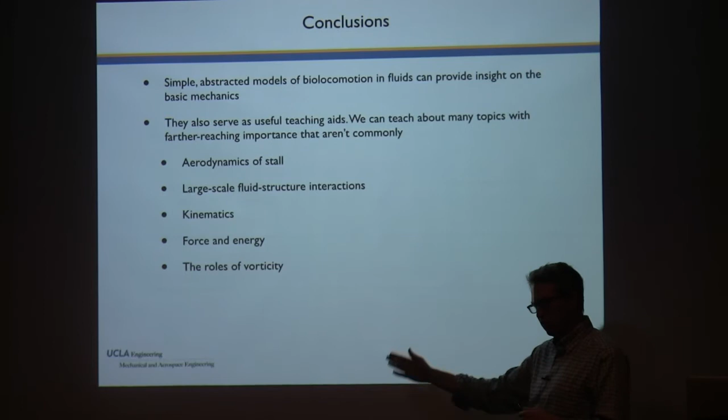The other thing is just kinematics, okay? Just talking about motion in general, like how do I describe the motion of an insect wing mathematically is really challenging. In fact, the closest we can come up with in a human-made vehicle is a helicopter, right? Helicopters have about 3 different reference frames because you have to look at it from the ground reference frame, the vehicle reference frame, and then the rotor blade reference frame, which keeps changing, right? But insects have even more, right? Because they can change their stroke plane dynamically and so on. So just describing the motion of insect wings is really challenging. So it motivates kinematics in a very interesting way.

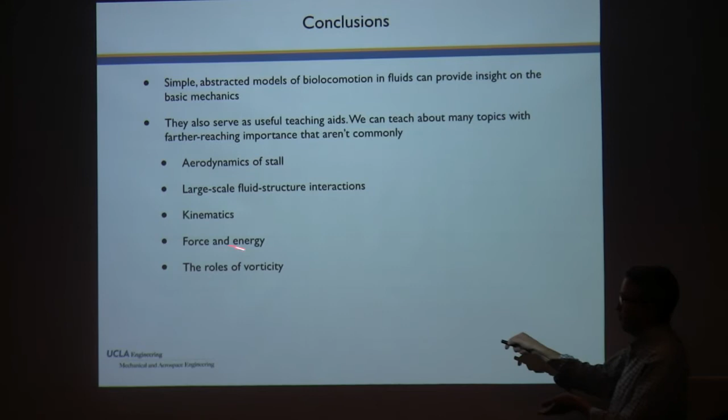And force and energy, right? So force is, what is the fluid exerting on the wing or the fin and so on, and energy, okay? And the roles of vorticity, which I've tried to make a case for today.

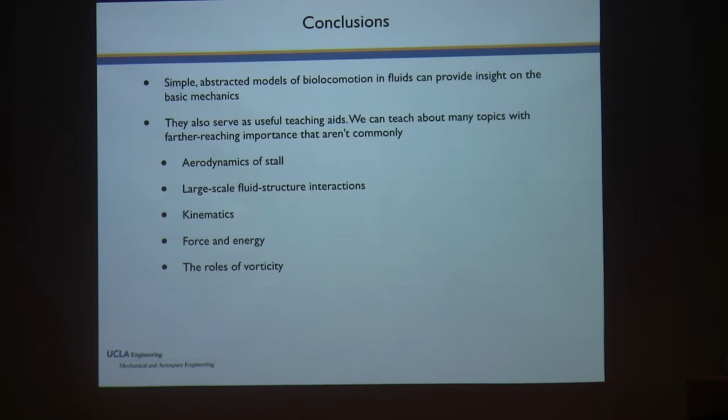There's other things we're doing right now. A lot of the stuff I showed you actually is a little bit from a few years ago, but the things I'm doing now, I'm interested in sensing as a topic, hydrodynamic sensing and aerodynamic sensing. So for example, fish have lateral line organs. To what extent can they use that to map out the fluid motion around them? I'm interested in that from a vehicle standpoint.

If I build a wing and I want to know, am I in stall or not, let's do better than what, say, Boeing does and actually build a wing that knows more about its flow situation than we otherwise would, and use that for making decisions, okay? So I'm interested in this relationship between sensors and the fluid flow, all right? So that's a big part of what we do right now. I'm also still interested in energy harvesting and flexible structures and fluid structure interactions in general.

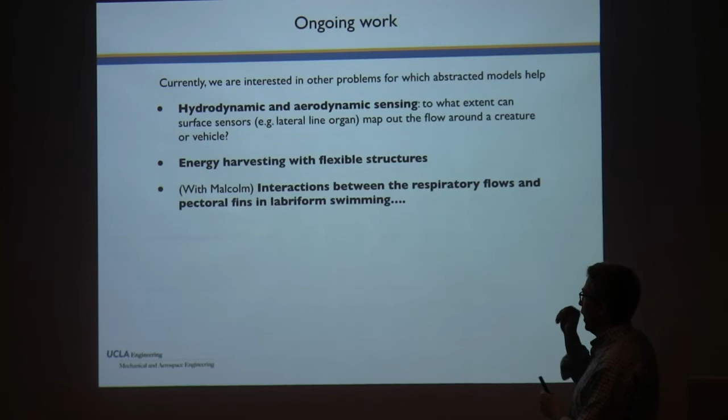And then I just want to call attention to the stuff that Malcolm and I have been doing in the last couple of years. One of the things that I find really interesting is seeing these sort of possibilities for how fish can exploit features of their body, their physiology, maybe in ways that we didn't imagine. So I just want to very briefly switch presentations because this is in PowerPoint instead of Keynote. This was the work of our master's student, David Lung, that he finished a couple of years ago.

Oops, that didn't show up. Let's see. I don't know how to swap displays. Okay. PowerPoint is set up in a mode where it doesn't mirror the desktops properly. So how am I going to do this? Okay. Bear with me while I try to figure that out. I'm sure there's a button here, swap displays. How about that? There we go. Okay, well, that's not quite what I wanted, but good enough for now. Okay.

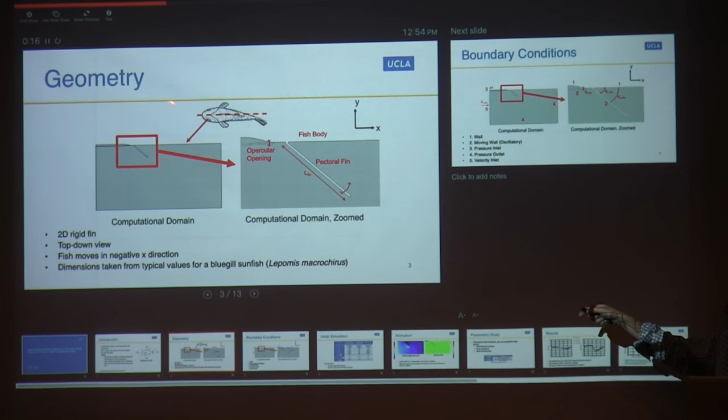This is a question of, in labriform swimming, which is done with the pectoral fins, they have the gill opening right in front of there, right? And so the respiratory flow coming out of the gill is right there in front of this pectoral fin. And so the question is, is there a substantial hydrodynamic interaction that might be important for locomotion? So here's our model. This is a 2-dimensional view of things.

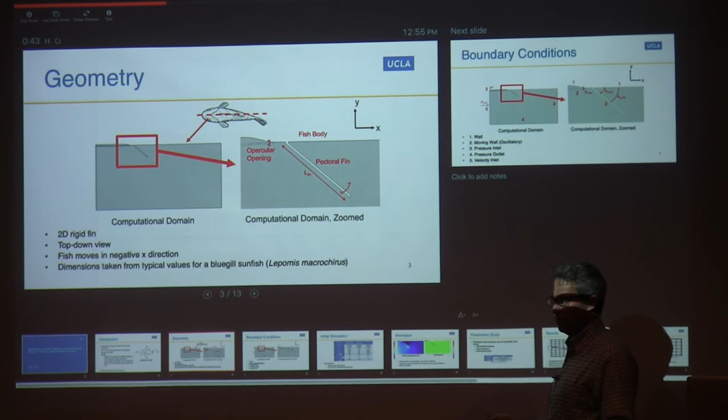Again, 2D. I was thinking of the joke that no one could ever call me a 1-dimensional researcher, but I'm certainly not 3D either, so somewhere in the middle.

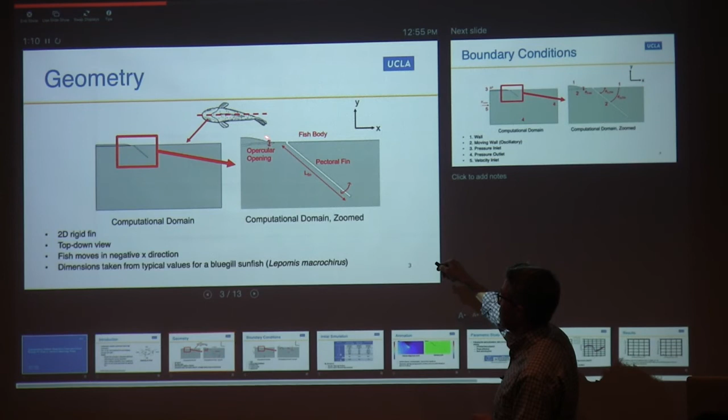So I have an opercular opening model here, which is, again, just in the plane. So there's a jet coming out of here. You can barely see this, but this is a flexible wall here. And this is the model of the pectoral fin, which is, just for our sake, fairly rigid. It's not changing its shape. And so we're just interested in, again, some abstraction here, imagining the jet that comes out of here that interacts with that fin as the fin is going through its oscillatory motion.

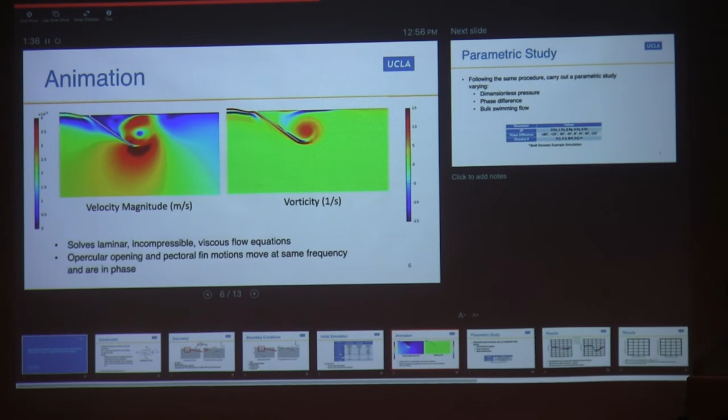So let's show the movie here. This is all that really matters. So you can see basically, this is the vorticity of this problem, just like I've shown vorticity in other movies today. And then you can see jets that come out of here, and the jet is easier to see with the velocity magnitude here. So the jet comes and interacts with the fin, and the timing of those interactions are features that are important. So what we found basically is it is important, but it's pretty subtle.

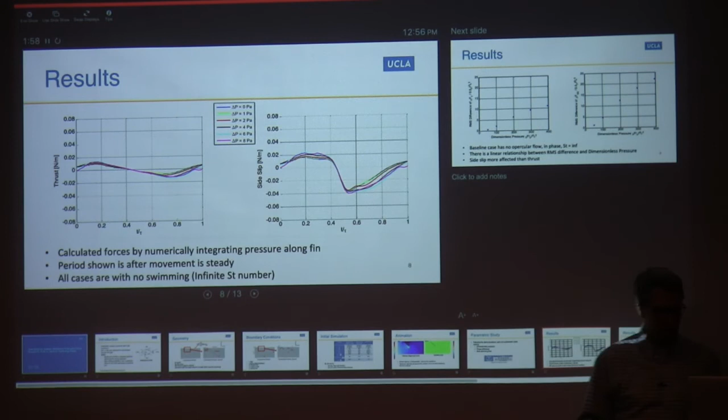And so probably our conclusion at this point is that it's probably not going to make them more effective at swimming forward, but it can be varied on either side of the body to make maneuvering a little bit easier. So I'm not quite ready for showing all those results, but it's work in progress. Okay. So that's all I have.

Isn't it the case that when you're showing the vortex streets, they actually are vortex rings? Yes, that's right. Exactly. So that explains why one is clockwise and the other one is... That's right. So you need to keep that in mind. There is a third dimension to this, even though he doesn't like it. Well, so even in 2D, without the full ring, it still shows up as counter-rotating vortices. Yeah, that's right.

So, should aircraft have flexible wings? Well, that's an excellent question. So when I teach this class on fluid dynamics of biological systems, where I'm emphasizing the fluid dynamics part and using biology as a target to analyze, I ask the students very early on in the term, why don't we build aircraft that flap their wings? And the answer is that it scales very poorly up to that size.

And it's because if you scale the amount of mass that I need, for example, and I look at also the energy requirements of flapping and so on, then you can make reasonable arguments that are pretty convincing about why creatures have sized out, but also why vehicles that carry people around will never be able to flap, because energetically it's too much of a cost. And so flexibility is a different question.